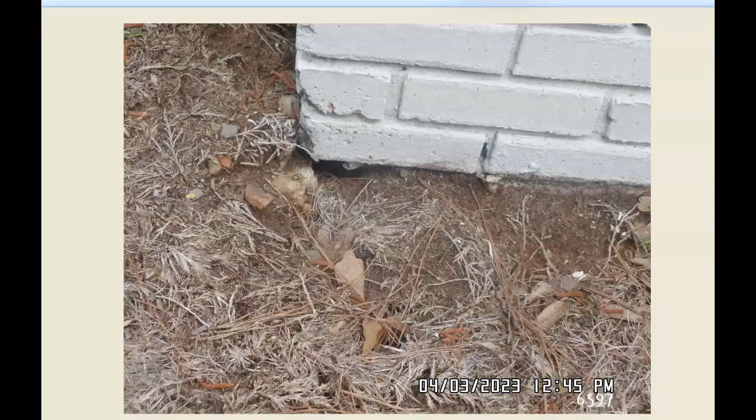As we go around, I'd like to walk you through some of the observations that we made, all of them minor. This is one corner where you do not see a concrete support underneath it. Usually the footing or the edge of the slab apparently has been broken at this point. The brick veneer is intact and does not appear to have moved, although broken areas like that are typically repaired. So this could be repaired. Here's a closer picture of it.

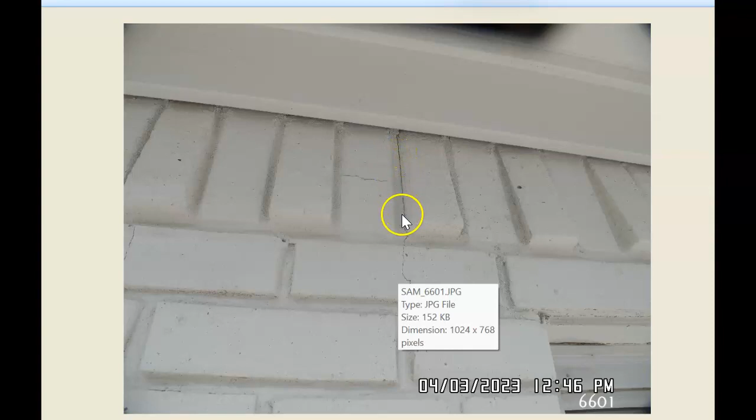This is just a photograph of a hole that was in the yard that just allows a potential for water to intrude. Looking at the doors, this is coming off of the master bedroom. This is very minor hairline mortar separation. These bricks that are stacked on the edge are called a soldier course. So we've got a hairline fracture that runs through the soldier course and hairline down through one brick and then one mortar joint. This is minor.

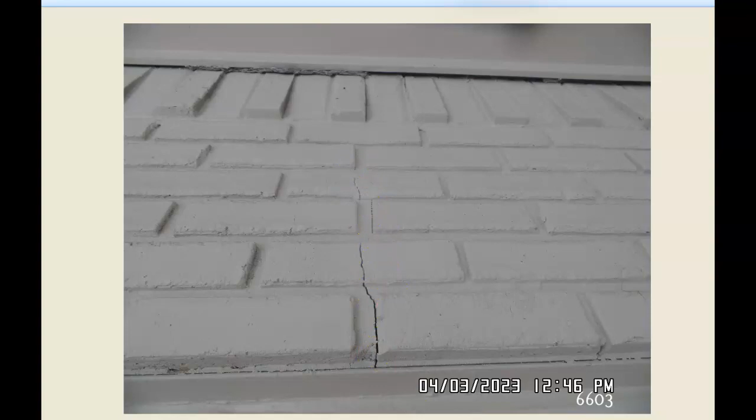Here's the back porch. We've got a little more pronounced separation. This is not so much structural; given the location, probably the weight on this lintel over time has caused this fracture, with it being wider at the bottom and then tapering to nothing as it goes up.

Then along the perimeter, on any home which has fill material, there's a tendency for the fill material to erode. And additionally, for those homes that have had underpinning, there are instances where the home has been lifted a considerable amount. It's not uncommon for this area to have separation and a space between the soil and the perimeter. There are some areas like this. Soil should be filled back, tamped, and sealed in all such areas.

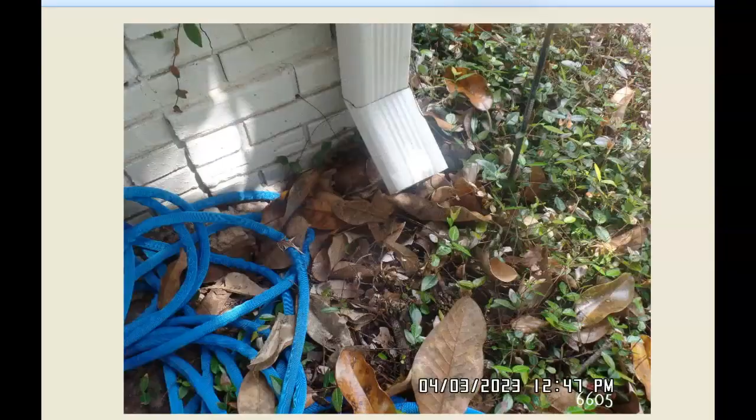The home has gutters across the front and across the front only. First of all, a comment on the gutters. We would recommend that gutters be installed in all areas in almost 100% of homes, but particularly those that have had some type of foundation repair, and we know that we are putting it at risk if we allow water to drop from the drip line at the roof and then percolate into the ground.

Additionally, when gutters such as across the front have downspouts that exhaust, all this does is concentrate water into this area and make it a high risk area for foundation movement. Downspout extensions and/or splash blocks should be installed in this area, as well as, if needed, underground piping to pipe water away from where it would be in close proximity of the structure. And again, in addition to this, we'd recommend gutters be installed all around the home.

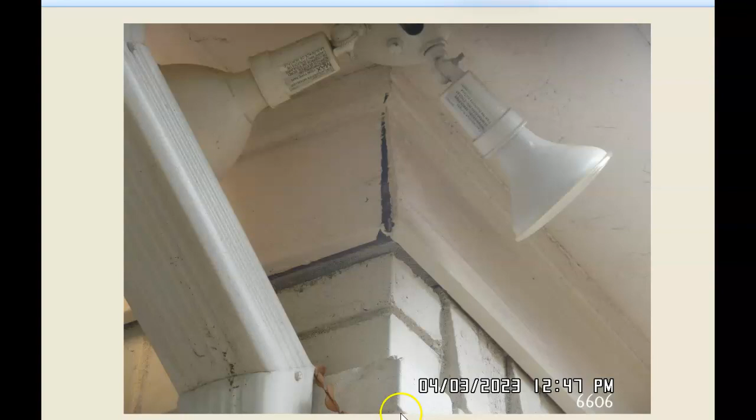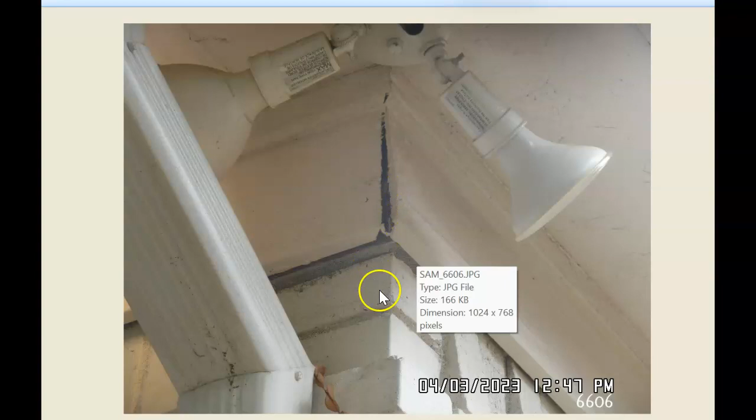One of the things that we look for is frieze boards. This is a mitered frieze board that is located at the top of the brick veneer that separates the brick veneer from the underneath of the soffit. Noted that it's got an opening, 1/4 inch or so, that has opened likely since it was painted last time.

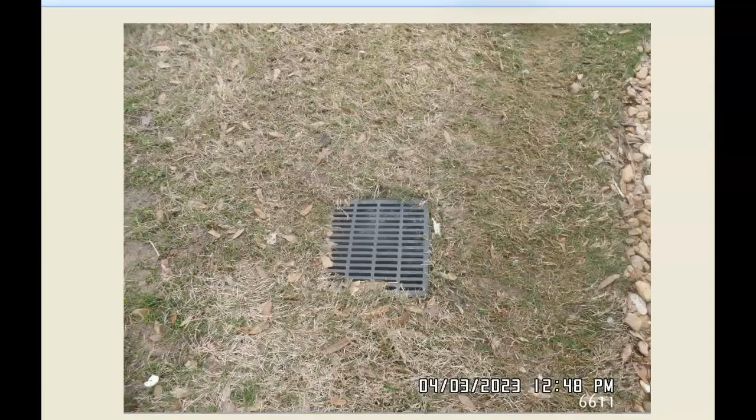There have been some drainage improvements made at this home. Obviously, we're not privy to what, how deep, how effective, but there are some catch basins that suggest that drainage improvements have been made. Here's another frieze board that has been mortared, sealed, and has not reopened.

Over time, fill material has a tendency to, and is at risk of, settling, and likely, although we can't be certain, having not seen it, consolidation of the fill material to the rear is the reason that this home had the original need for underpinning.

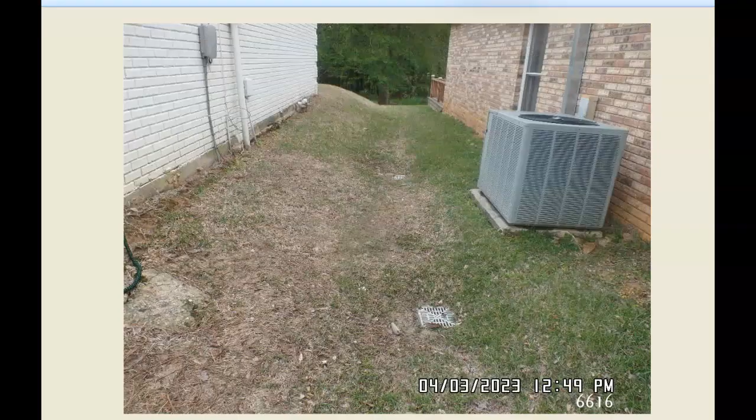Going down the side, we have a drain that empties here. This home does have gutters, but the concern is here at this location where there are no gutters, fill material, and this water runs directly off and has a tendency to soften this soil, work back underneath the grade beam, and result in higher risk of foundation movement. Closer view, and again you can tell the amount of fill that was used.

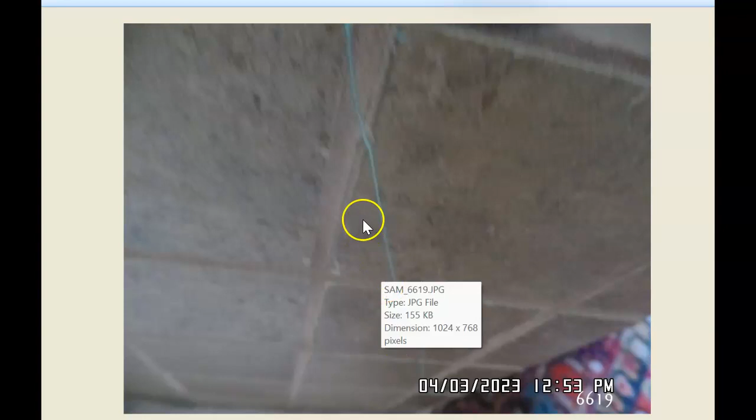There's fractures in the driveway. That's typical of what you'll see. And I'm going through the inside and looking for items of concern on the inside. In the tub, we did see there's a crack in the tile area, master bath, and at this juncture it's difficult to say if this instance is related to foundation movement. This is typical of what we see in other cases, and it quite likely is.

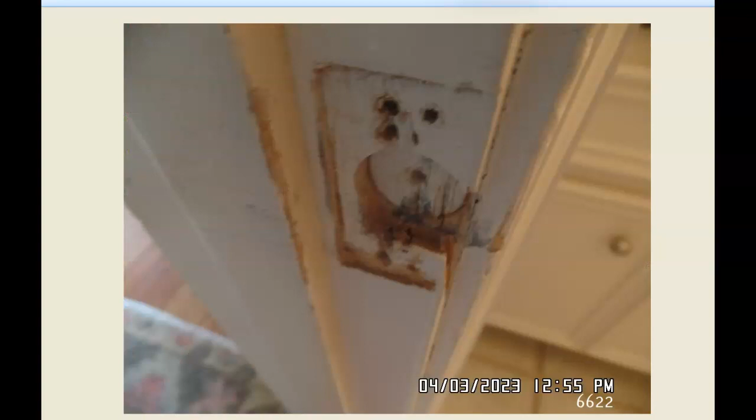Door is missing the striker plate. Some general repairs need to be done to doors, and this door did not securely engage the striker plate, so a couple of doors need work. This flat area has a fracture that goes across it, primarily cosmetic in nature. Just maintain this seal so that water does not intrude in this area and it become a tripping hazard.

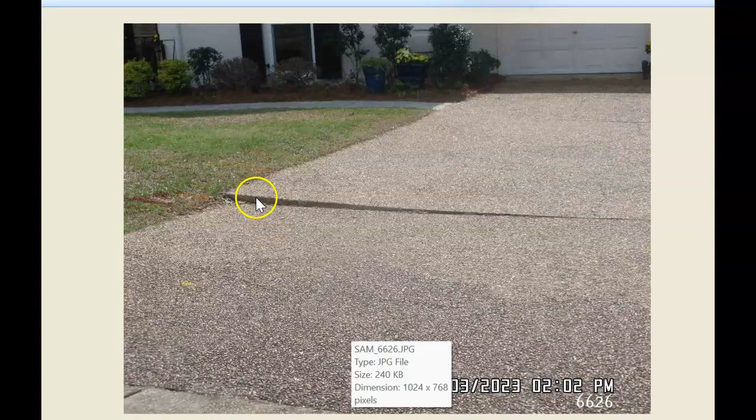Out front, the driveway has some vertical separation. Actually, this should be lifted back up to that. We have a number of foam contractors in this area that perform that service, where they can come in and actually lift this back up to there. This being on the front, this being a potential tripping hazard, this item should be addressed.

Next, I would like to review with you the elevation survey that we performed. And first, I will acknowledge that we did receive the old elevation survey that was done by the late Mr. Roby Kite, P.E., some almost 20 years ago. No attempt was made to do a comparison of the two. I don't feel that that's that relevant at this point in time. I think what's more important is to look at what the slab profile is currently and to date.

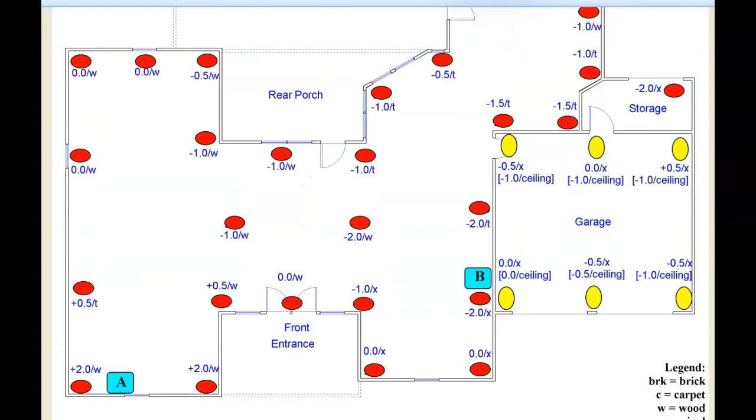The way we did this was first we drew the outline of the home, and you'll see that this is the outline starting at the front with the front entrance. We take a 0 reference. The 0 means that's 0 inches, 0 tenths, and the slash W means it's on wood. So starting here, this is 5/10 higher on wood. This is 2 inches higher on wood, and this is 2 inches. And this A in this area means that the highest point in the structure is in this area. Coming around, 5/10, 0.

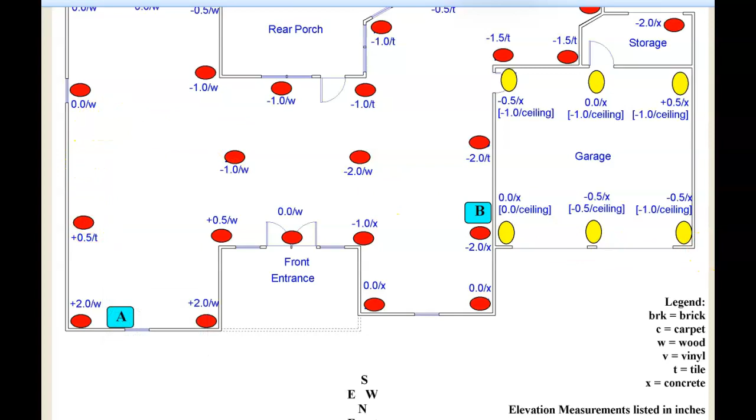And we can look at the back. Numbers continue, -1, -1. They're fairly consistent toward the back of being slightly lower than they are on the front. So we've got from here to here, there's a 2-inch downward slope to the back. From here to here, there's 1.5 inches. Looking across this area, there's a 1-inch slope to here, a 2-inch across this direction.

The greatest variation is this is the lowest area, this -2, and then over here, this is on concrete in the storage room. This is on concrete right there, and I think that must have been the dining room area. So 2 inches below the reference point, 2 inches above the reference point, makes it a 4-inch variation. Is the overall max variation across the slab.

The garage, this is where the 0 reference point was taken. We measured 1, 2, 3, 4, 5, 6 points on both floor and then on ceiling. So you can see here, this is a 1/2 inch low. This is a 1/2 inch higher. That means that this actually coming across is sloped upward by 1 inch. From here, it actually slopes downward by, correction, a 1/2 inch. And then you can see the ceiling numbers measured to be the same. And in here, the ceiling numbers do slope downward slightly.

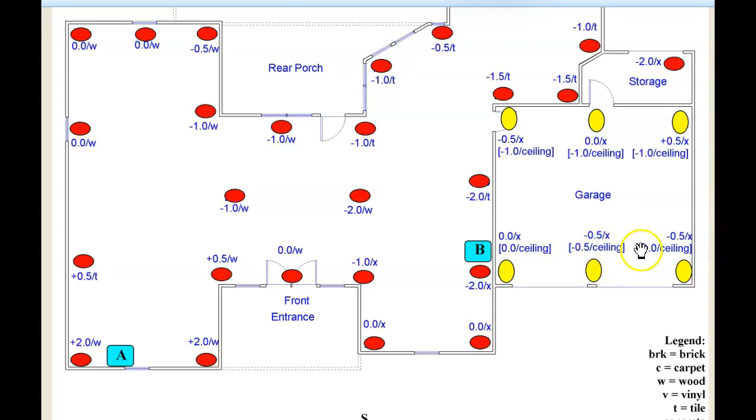Okay, now having looked at this, what does all of this mean? This home, number one, has had some problems, likely related to consolidation of fill material. It does have some elevation variations that are present. The variations that are currently present do not require any adjustment at this time. The variations that are present do underscore the need, though.

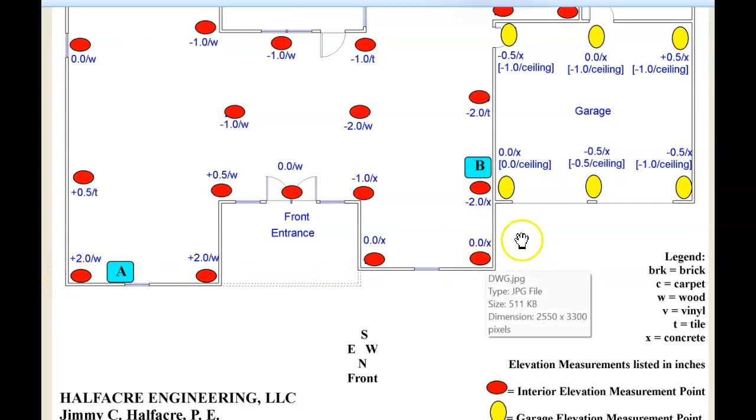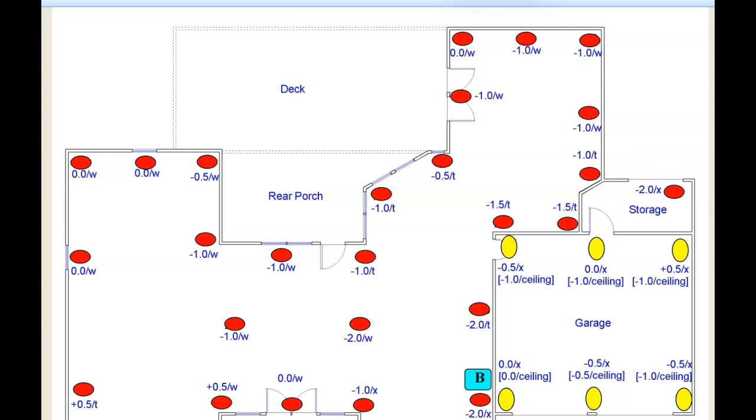Currently, the gutters that we have are across the front. What's needed is to install a full set of gutters on this home, at all applicable areas, to minimize the potential for water intrusion into the soil in the general neighborhood of the supporting components and being able to cause additional movement. Water and expansive soil that will either expand or else contract under wet conditions is a concern in most of these neighborhoods in this general area of Rankin County, as well as neighboring counties. So in addition to gutters, maintaining the drainage would be another item that a future owner should be interested in.

But as far as the overall condition of this home, it is not one that, in my opinion, is in need of additional repairs at this time. And it probably is typical of what you would see in this area. In addition to what I've already said, I would repair the driveway, especially since visitors to the home would be walking across this area. It's a liability for a homeowner. It is also a safety consideration. So that area should be repaired. And otherwise, with those items listed above, I think that's all.